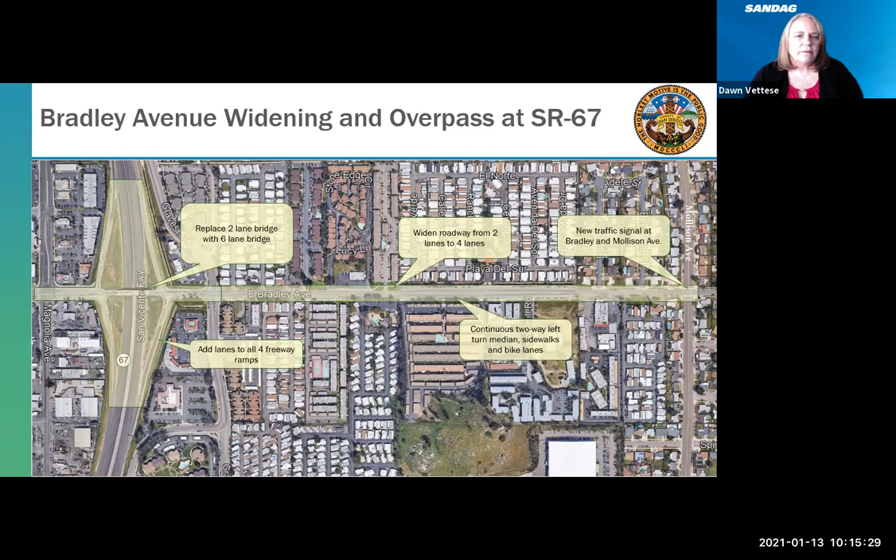That concludes my report, but we have Bill Morgan and Jim Bowles from the County of San Diego available to address any project-specific questions. I'll turn it back to you, Chair Kenny.

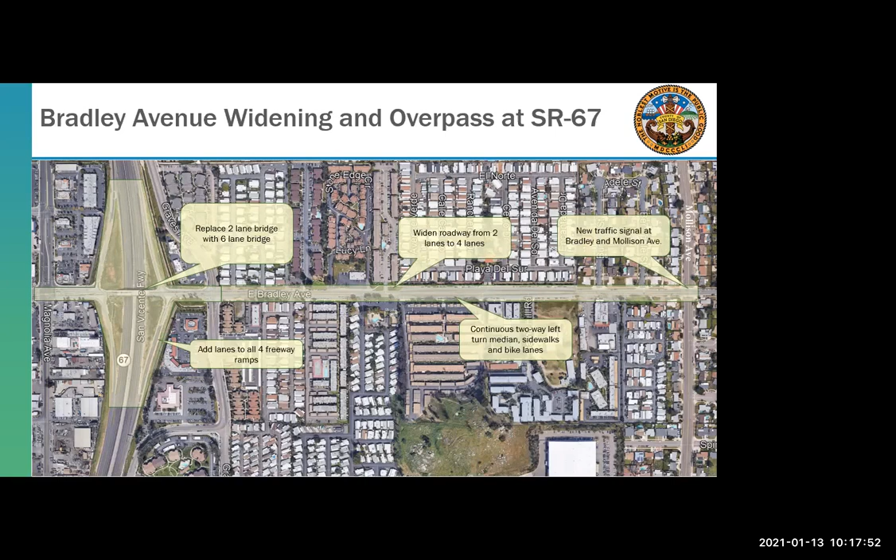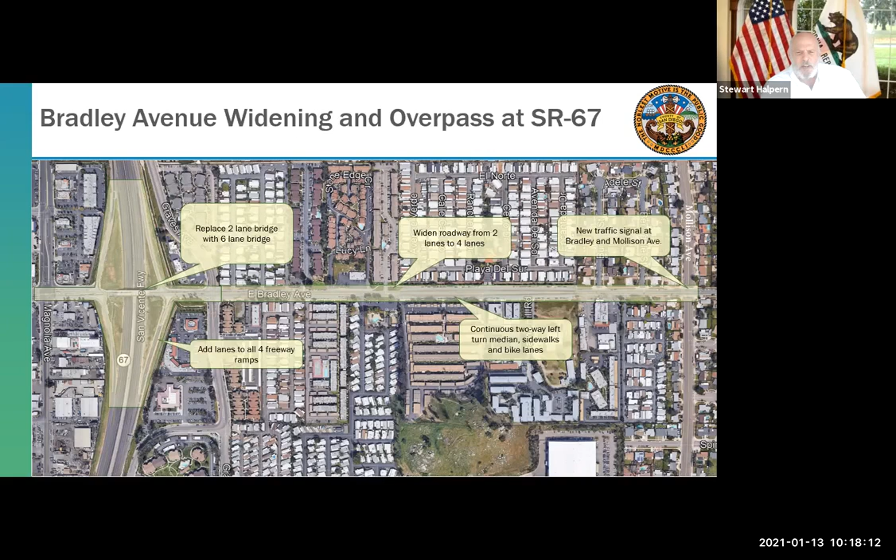Okay, thank you. Thanks, Bill. Stewart? Yeah, thanks, Tom. The question that comes to mind - I apologize, I know we've talked about this in the past, I just don't recall - this project takes, I think, about a third or so of the current availability under the commercial paper program. Dawn, or I don't know if Andre or Jose's on, refresh our memories as to how easy it would be to expand the commercial paper program.

My vague recollection from prior discussion of this is it's not so much a credit problem in terms of availability, but rather a board authorization thing, where the authorization just happened to be set at this level. Maybe walk us through, if there are additional desires to fund additional projects using commercial paper, how quickly we can respond to that.

Thank you, that's a great question. To refresh, I think what we reported back in November when we discussed the NCTD commercial paper - we do have a verbal that the credit from our CP provider could be quite easily expanded. The level is set at 100 million. Expansion of the commercial paper was also one of the options in our cash flow presentation. So we are looking to come back in the springtime to request expansion of the commercial paper program.

This particular draw on funds from the commercial paper program fits within the existing capacity and the balance outstanding. Since this is a rolling program, folks who have already accessed it are repaying principal as new draws are made. We've run that analysis and don't anticipate a problem with the draws and the draw schedules in the near term. The program actually needs to be renewed in the late fall regardless. We would seek board approval to expand the program, but since there are fees with the amount of credit that's extended, to be prudent, we would not necessarily exercise that immediately until it's needed.

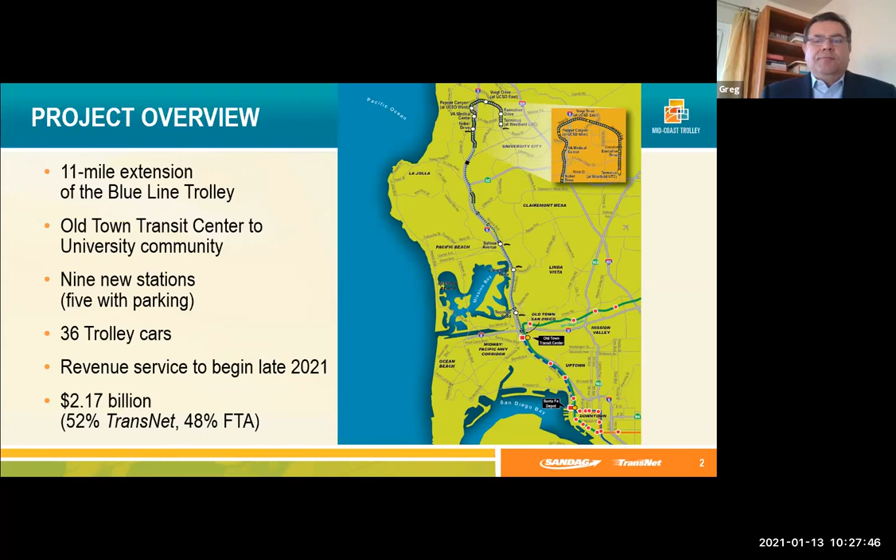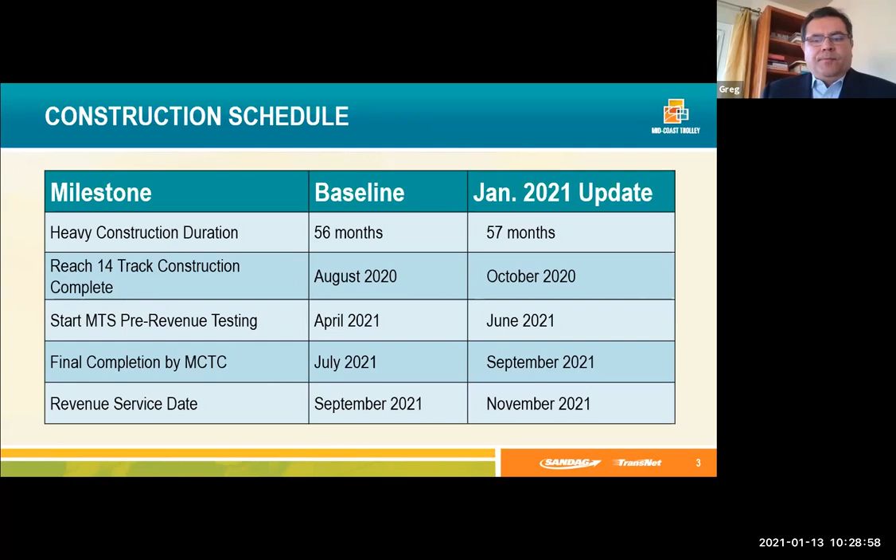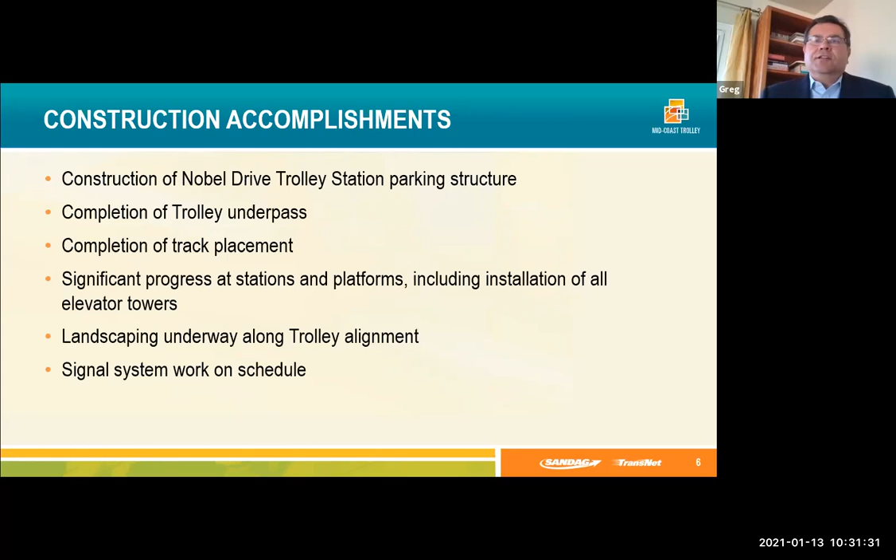The trolley underpass at La Jolla Colony Drive is now complete, and I'll be able to share a picture of that. Track placement is also completed. We're really focusing now on getting our stations up and running and ready so we can start testing necessary to move forward with running trains on the tracks, completing pre-revenue operations testing in time for opening revenue service this year. We've also started landscaping efforts along the corridor, and signal system work is on schedule.

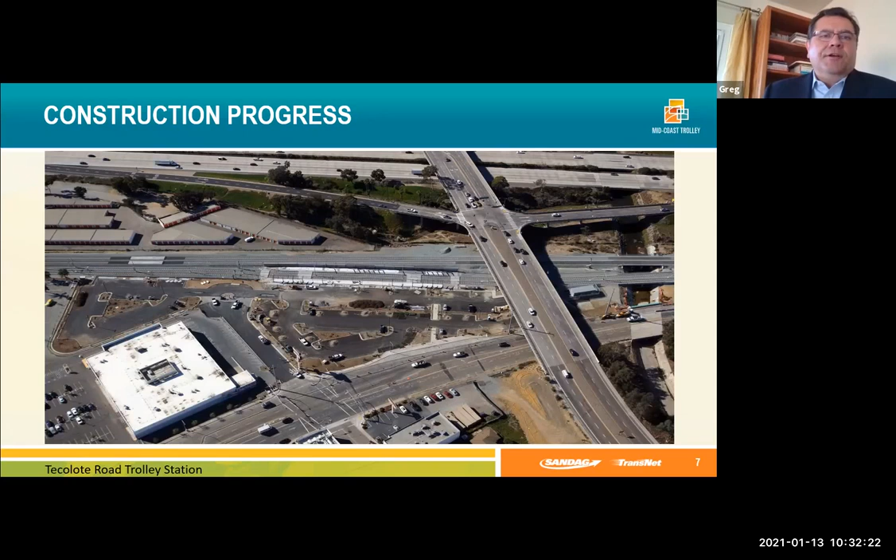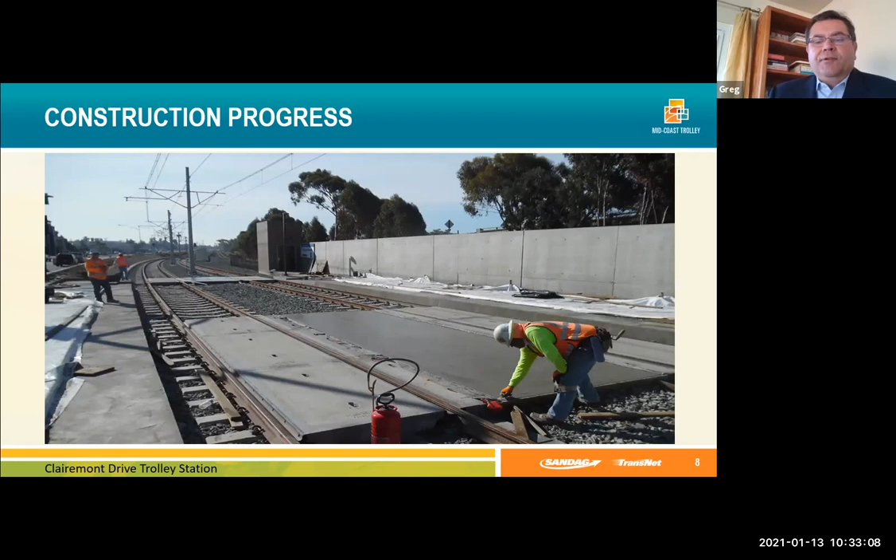We are working with private developers right across the Morena Boulevard to help us provide the 150 parking stalls that will be supporting our transit users. We're working closely with his transit-oriented development and seeing how that continues to move forward. As part of his development, we are also working in mobility hub features such as pick-up and drop-off areas, next bus signage, as well as trolley schedule information. So we'll continue to work with him as we complete that station.

At the Balboa station, it's our third at-grade station. You can start seeing the park and ride facilities start taking shape. We already have the access in place. One of the additional features that the Balboa station brings is that we do have actual bus bays for buses to come in and serve all the adjacent communities. We also have, just to the north over Balboa, a pedestrian crossing so that it can facilitate pedestrians coming from the north side of Balboa Avenue to the station itself. So those are some of the other key features we have going on there.

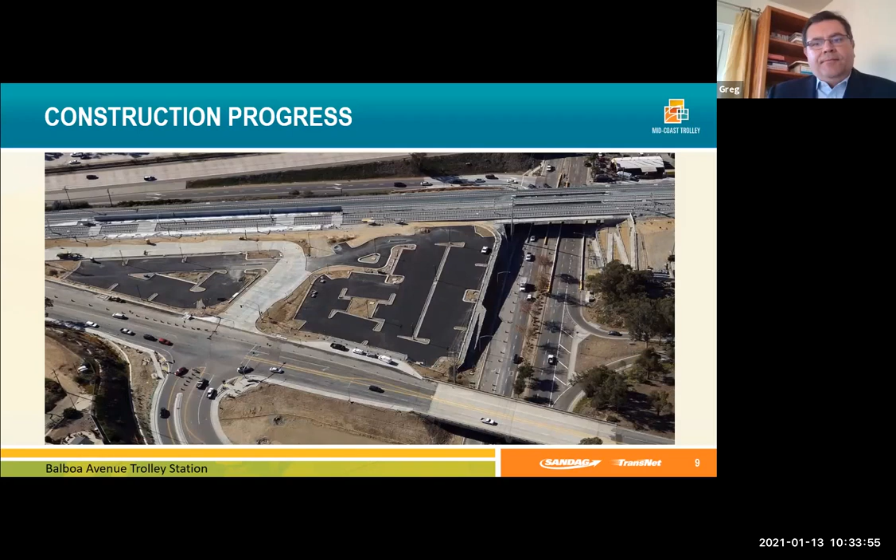Our flyover is basically where the light rail system, prior to this location here near the end of Santa Fe Street, is on the east side of the railroad corridor. This flyover structure allows us to move our light rail system to the west side of the corridor and allows the LOSSAN tracks to continue on in the eastbound direction. Then from this point on, we continue into the Interstate 5 corridor. The inset there kind of shows you a look of our light rail facilities. Just to the left, you'll see a nicely sculptured retaining wall that is there to support the Rose Creek bike path, which was constructed as part of the Midcoast project.

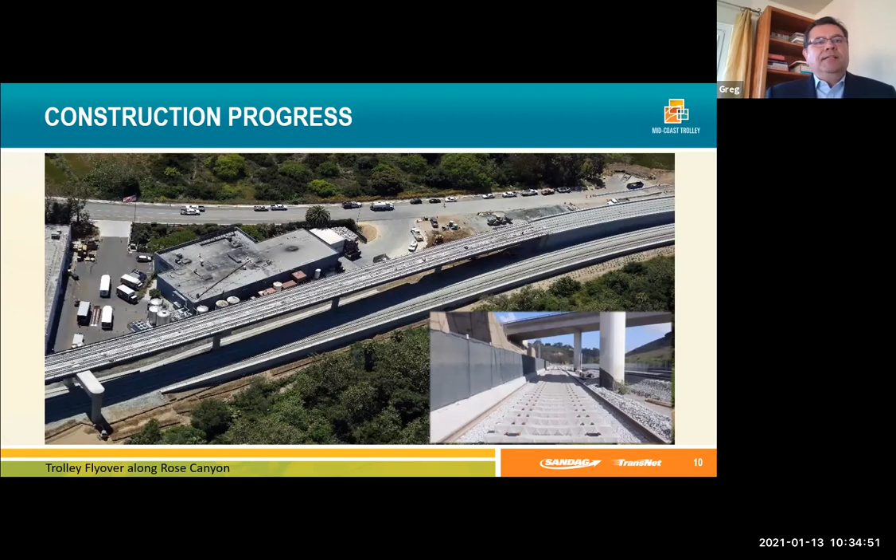Here's an aerial shot of our underpass at La Jolla Colony Drive. The project is completely grade separated, and we also have a traction power substation there to the left. We are working very closely with SDG&E to ensure that we have all the power necessary to start completing our testing and operations plan for the trolley system. So you'll be seeing that the traction power substation will be energized within the next few weeks, and we'll continue to move forward with other locations throughout the corridor.

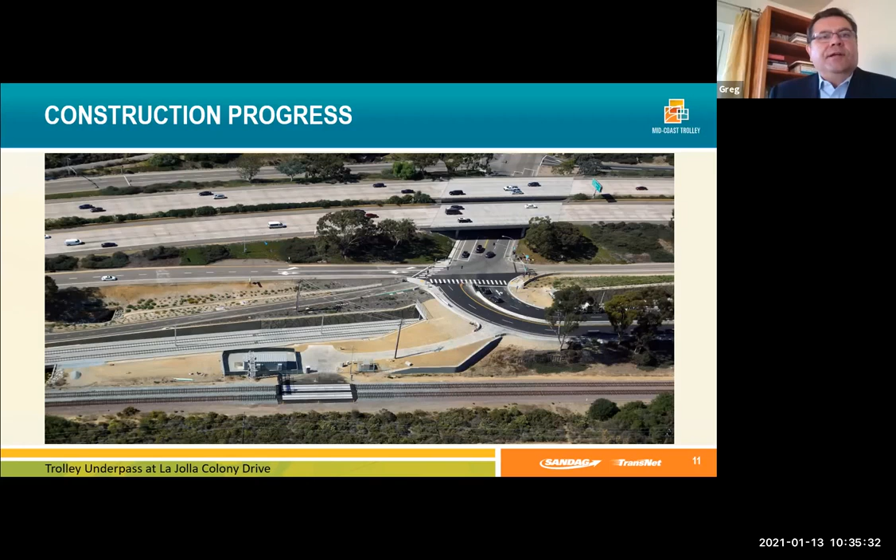Here's another shot within the undercrossing. It shows the center pier wall as well as the exterior walls and the track alignment. We also show some of the architectural features applied to the retaining wall system as you continue north of the structured area.

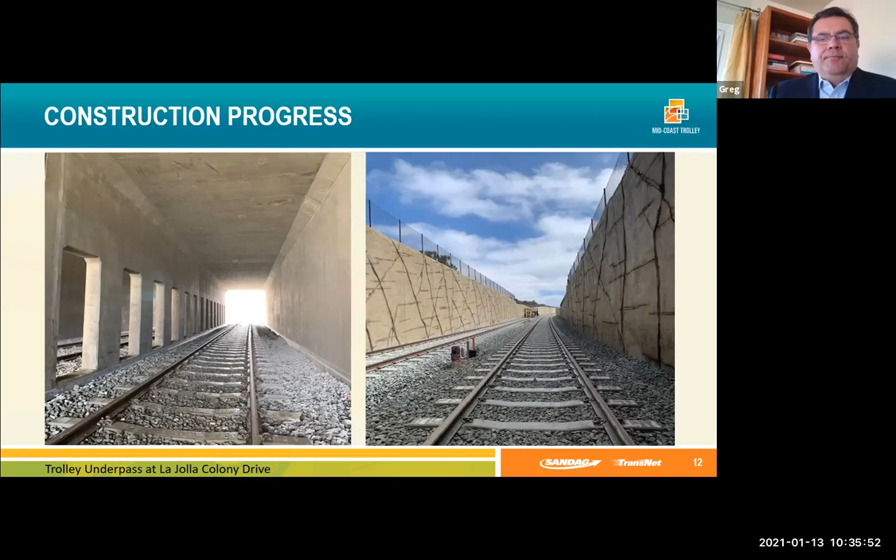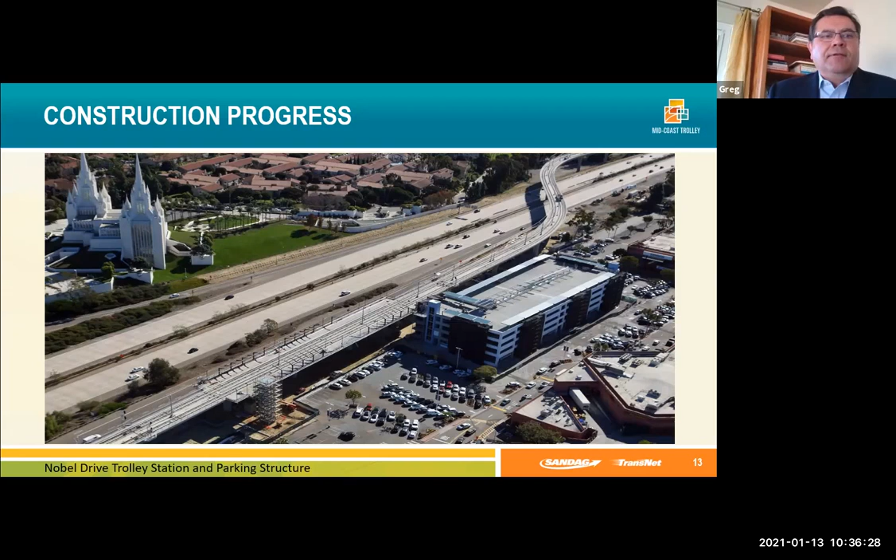This is a view of our Nobel light rail station. It also shows the parking facility that we have constructed to the right of the station, and we are continuing to progress with that. As I mentioned earlier, we're hoping to have that parking structure open for use. Once we have it open, we're going to be able to transition into surface lot improvements, as well as completing some of the plaza improvements that will support the light rail aerial structure and station.

Here's a view looking northbound onto the VA station. To the right is a retaining wall that you can see from the Interstate 5 corridor. You can see that we have already started some of the structural elements that will be supporting the canopies and the platform area work. Where that worker is standing, there's a white tarp over a glass seeded aggregate finish that has already been applied to the plaza area. In the center, we already have our overhead catenary system, wiring, and messenger wires in place at this location.

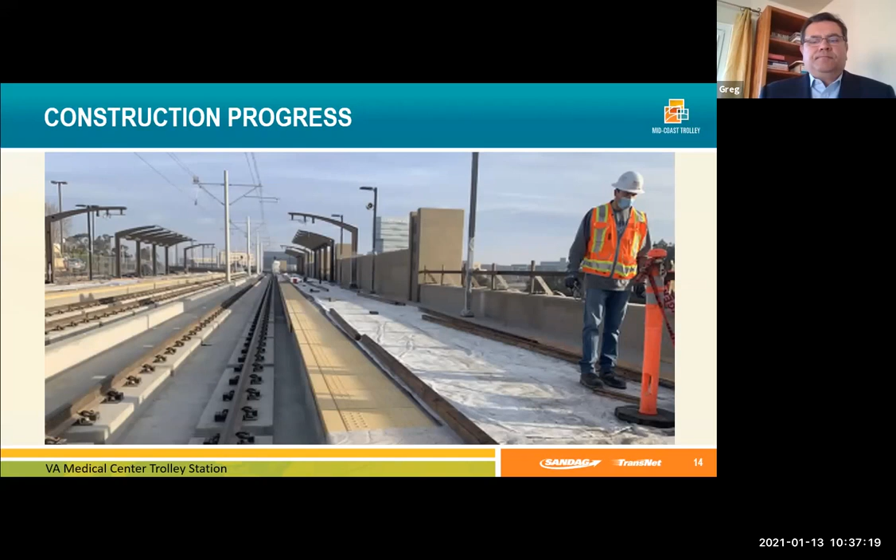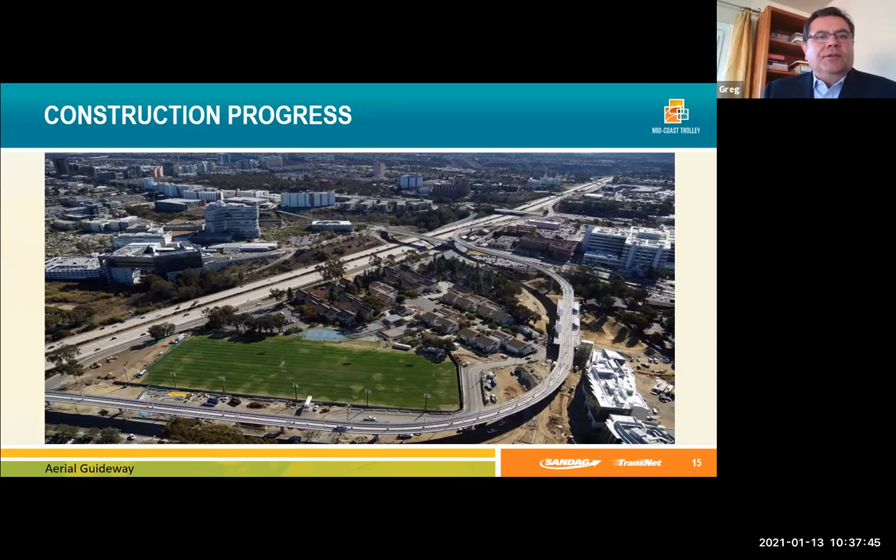This view is a southbound view overlooking the UC San Diego campus, showing the alignment coming from the VA. It has a bit of an S curve, coming into our next aerial station at Pepper Canyon. As you can see, there's a lot of construction going on there. The viaduct is completed, as well as all the track work, and we're just about there with our overhead catenary system.

The project will require a restoration of the field that you see there. We have a detour in place right now. One of the things that has been really great is support from UC San Diego.

We've worked very closely in the development of the landscaping in this area, and at the base of the plaza area for this Pepper Canyon station, we've incorporated a bus turnaround area to facilitate drop-offs, as well as other UC San Diego transit facilities. We'll also be incorporating a roundabout intersection leading into the station. A lot of these improvements are also funded by UC San Diego.

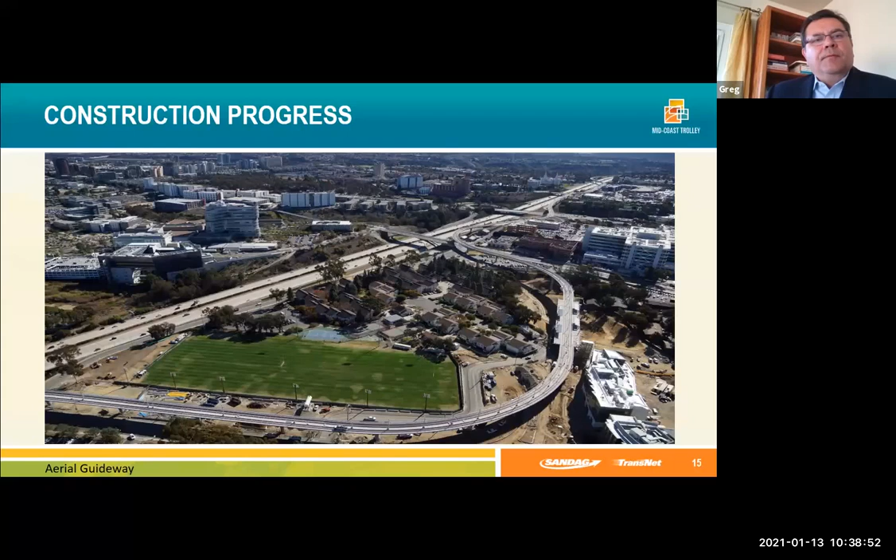So at the end of the day, we're really going to have a complete looking system that benefits bicyclists as well as pedestrians, and serves the trolley station. Our next slide will show another view of this location.

One of the things that, again, our contractor has done a really outstanding job on: you can see in the middle is the light rail station. To the left, you'll see our elevator towers. And then right to the left of that is a building that...

...UC San Diego is having in construction. That building is about 50 feet or so offset from our light rail viaduct system. The continued coordination there has been instrumental between all contractors involved to get this project working and completed, which should be within the next few months, keeping us on schedule.

To the right, all that area underneath the elevated or aerial station will be landscaped as part of the Mid-Coast project.

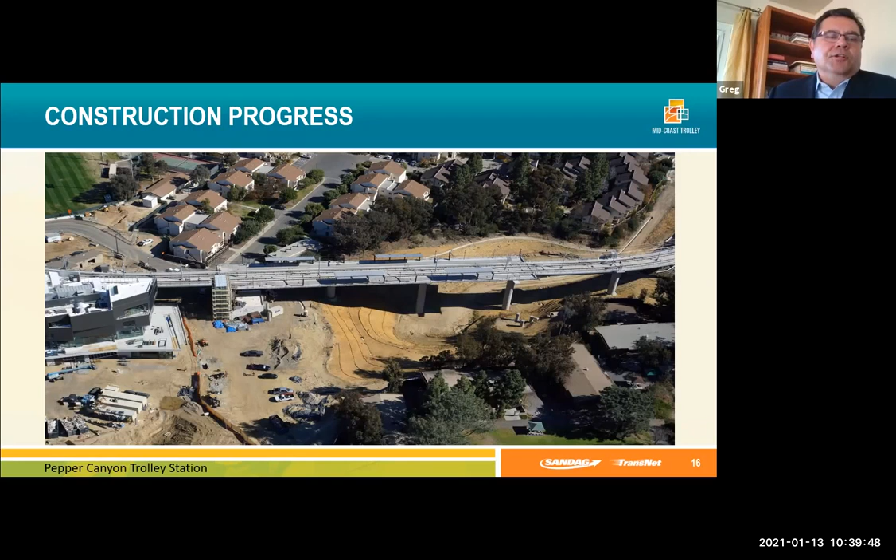This next slide shows some flat work and stairwell improvements being constructed at our Voigt station. In the background, you can see the Zymed building, and behind that is the Scripps Memorial Hospital facility. This station will service all the research centers at the UC San Diego campus, as well as those adjacent medical facilities, and Preuss School, which is just across the way.

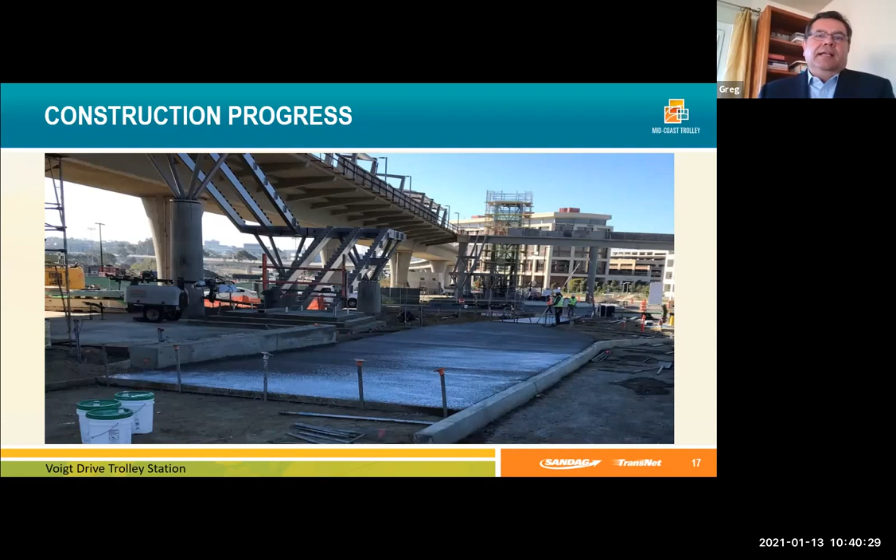In the background there, you can see a pedestrian bridge that will also be constructed to provide direct access to the Preuss School and adjacent properties to the north of Voigt Drive.

Here are some more plaza improvements being constructed at our Executive Drive trolley station. You can see the stairwells that we'll be providing there, and in the background is the elevator towers.

Again, we're working directly with the developer at this site, and once we complete some of the basic site improvements and pavers and whatnot, they're going to come in and do the landscaping. We entered into an agreement during our right-of-way negotiations, as that was something the property owner really wanted to do, to ensure that everything married well and met the project's needs as well. So another good example of the collaboration on this project.

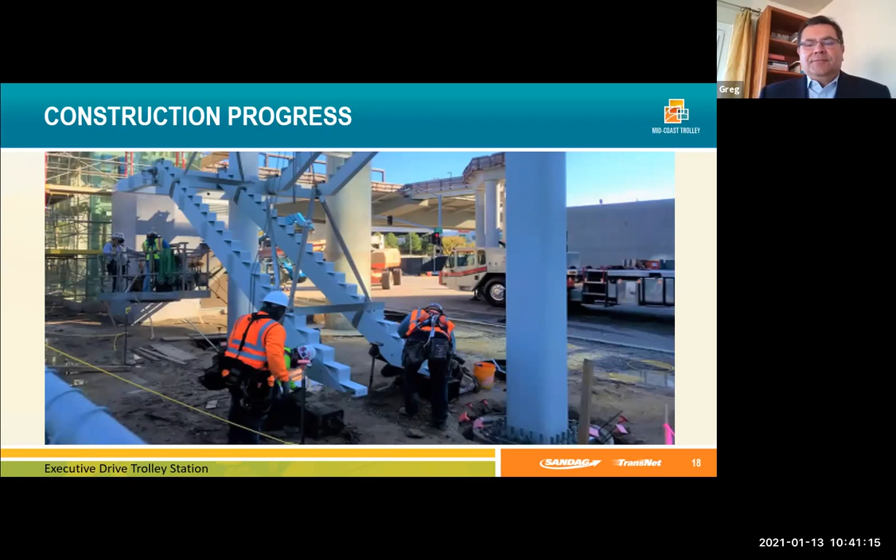And then this is our last station, the UTC Transit Center station. You can see the Transit Center directly in the center of this photo. To the left, you'll see some elevator systems and pedestrian walkways that lead to the aerial station down the middle of Genesee Avenue.

We've worked with both developers to locate these pedestrian access points and integrate it with their existing development, and we continue to do that with Westfield folks to the east of this corridor. We are now in the process of completing a design of a parking facility that will accommodate at least 260 spaces for parking to support transit users in that area.

We're anticipating construction will start within the next few months and hopefully be completed in line with the opening and revenue service start date later this year.

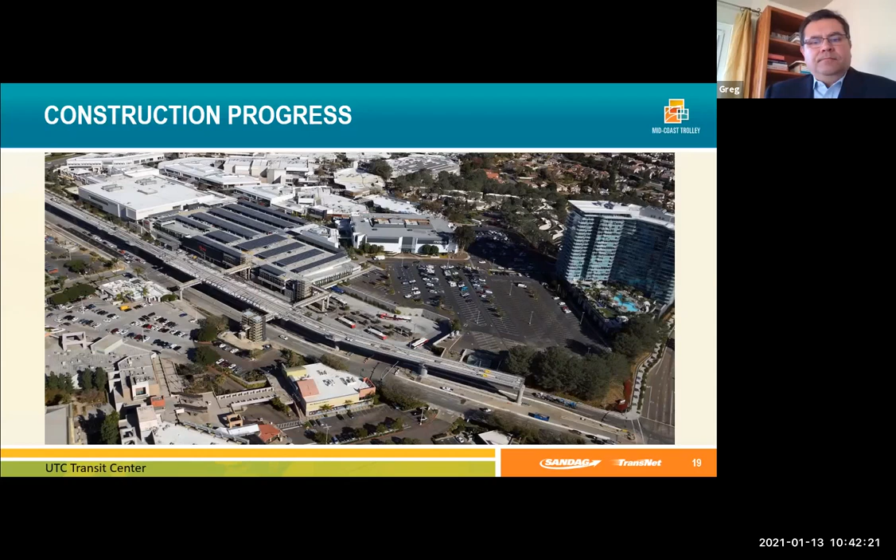On project risk, as we move forward to complete construction, we will continue to maintain the project risk and contingency management plan for the Mid-Coast project. We do project risk register updates bi-monthly to track, monitor, and identify any new risks that we may be facing as we continue to move forward in other areas of construction.

This table here shows some of our top risks that we have identified and will continue to monitor. One of the big ones is the right-of-way cost. A lot of our right-of-way has certainly been acquired to support construction, but we may not have completed settlement on all of those. And as we continue to move forward trying to reach agreements, some properties may end up going to trial.

And so again, we continue to monitor costs, but at this point, we have identified what we think the actual estimated cost at completion will be, and incorporating the budget, we're still looking healthy on that front.

Again, there are a couple other areas where we have right of way issues, where potential goodwill claims could come at the completion of the project. That is where we don't have any federal participation supporting that effort. We do have a budget associated with that and we'll continue to watch, but we've been very proactive in entertaining some tenants of these properties and have already come to an agreement and reached some settlements, so hopefully there will be no further potential for goodwill claims. We're trying to be proactive, but there is always that potential risk there.

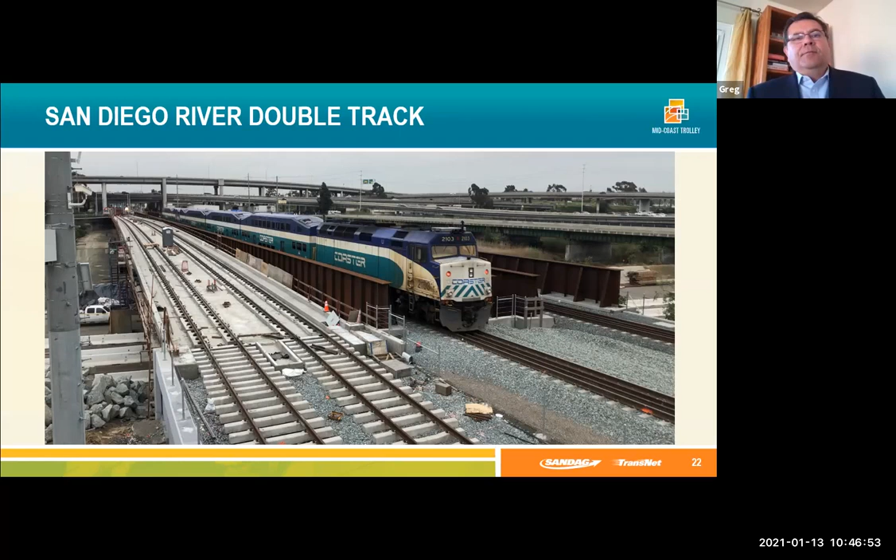This shows the double track efforts done at the San Diego River Double Track project. To the left are the light rail bridge facilities, and to the right you can see the COASTER already operating on the replaced bridge, and just to the west of that was a brand new bridge constructed to complete that section of double tracking on our LOSSAN system.

Next slide. This shows some of the track work constructed as part of the Elvira project. The Elvira project provided a double track system just a little bit south of Balboa Avenue and extended pretty much along to the flyover we saw earlier. It included bridge structures at Balboa Avenue and three crossings of Rose Creek, and that is now open for operation.

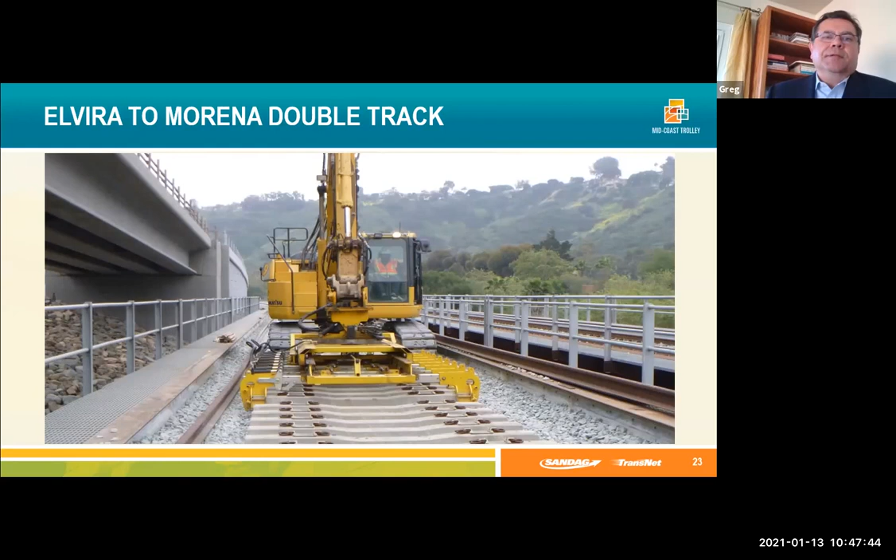Again, this along with the San Diego River Bridge, we do have some plant establishment and revegetation efforts within the creek area and the river area that we're continuing to maintain, ensuring everything comes to our expectations as far as the establishment of landscaping in those areas.

The I-5 Genesee Avenue Auxiliary Lane was recently opened late last year. That provides an additional lane to enhance operations of that section of Interstate 5 southbound traffic lanes, picking up from the Genesee on-ramp going southbound and terminating and dropping off at the La Jolla Village Drive off-ramp. That is now under operation, closely coordinated with a lot of the improvements you can see here on the project.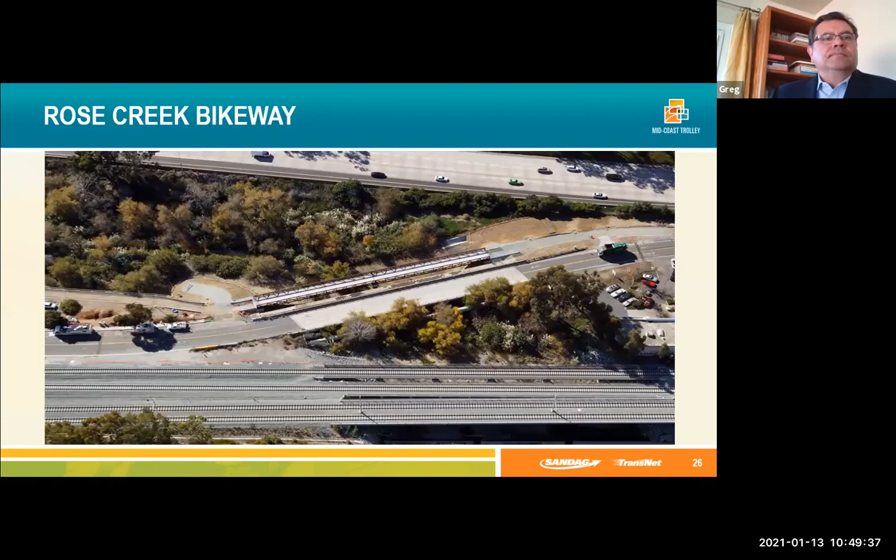The Voigt Drive Improvement Project will realign Campus Point and provide better access to the Voigt LRT station. It will also provide parking lot improvements that allow access from both the east and west side of Campus Point, the new Campus Point you see there in operation. We've also provided improvements to the Preuss School parking lot to better facilitate pedestrian circulation and access from our landings on the north side of Voigt to get to the bridge and to our trolley station.

This project is still under construction, and we're working very closely with the Midcoast project. Next elements of work scheduled would be the parking lot construction, completion of the roadway improvements, and then advancing to final landscaping of the corridor in that area for both the Midcoast and the Voigt project.

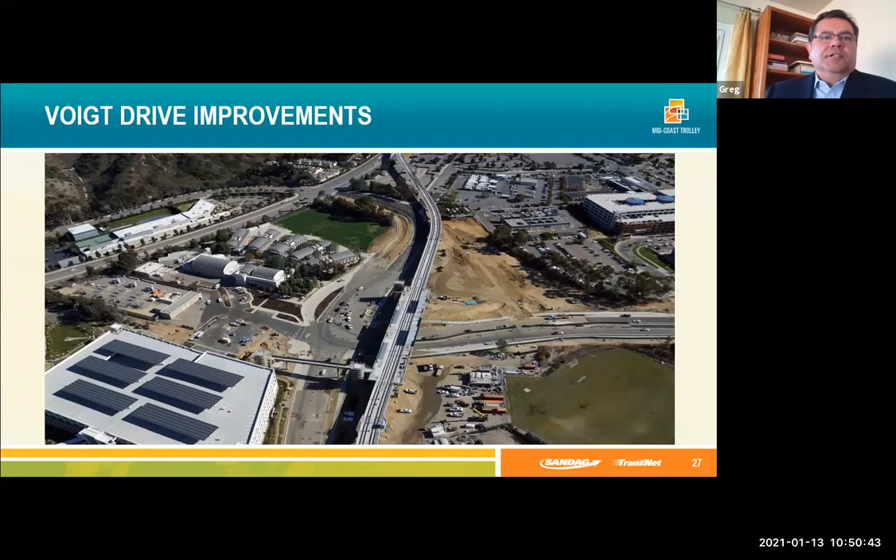Due to COVID, our public outreach activities have been modified in accordance with government policies. We are providing project updates through electronic media. As today, we are attending virtual community planning group meetings, and we're having ongoing bi-monthly virtual briefings with city council staff. Some significant construction events are covered on multiple news outlets, and we've started opening day planning for the Midcoast project—exciting news. We're going to be collaborating with a lot of our stakeholders and starting to see how we can put something together at the end of this year.

All right, well, thank you very much, Greg. An excellent presentation, an exciting project.

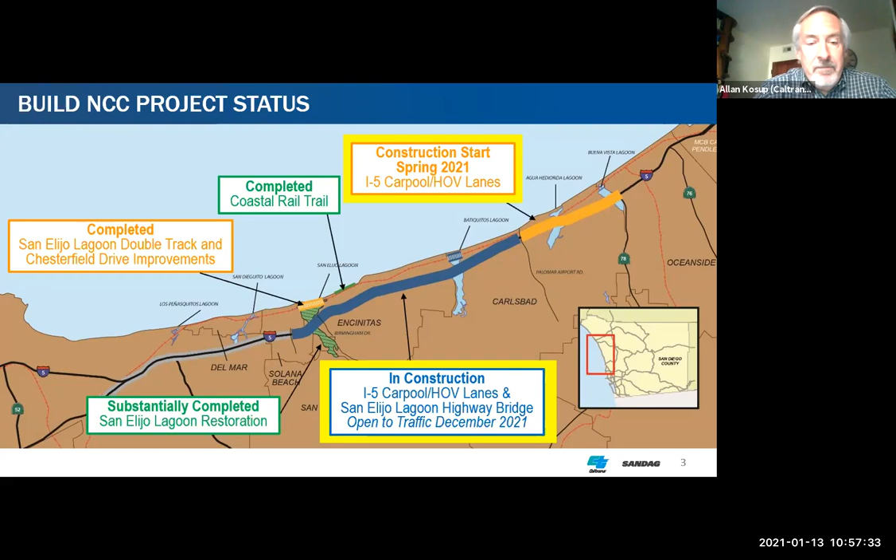The good news with this approach is you get the efficiencies and the innovation of building all these projects together. But the idea is as pieces are available, you can start on those pieces and open them to the public sooner. So it's not like we have to wait for it all to be done for the public to start seeing value.

So far, 3 of the major features are complete and open to the public. The double track was completed in 2019, the Coastal Rail Trail, and then in 2020 the lagoon restoration was completed. We're in plant establishment now, and really the remaining elements are the carpool lane extensions up to 78. This slide shows the quick status of those, and we'll get into a little more detail.

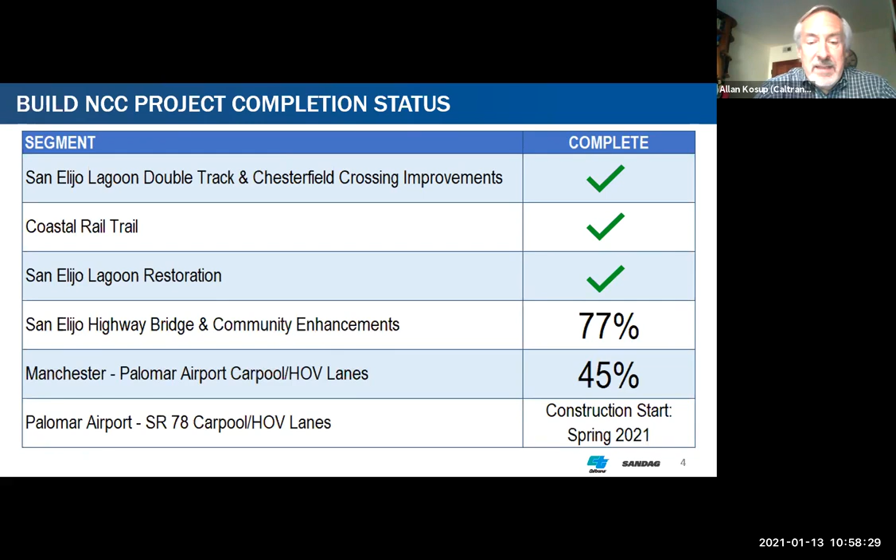Before we do, how can we have any conversation these days without talking about COVID and the impacts of COVID? I like to share this slide, thinking about COVID in at least 2 different ways. One is just the impact to the economy and the traveling public. This slide shows the reduction in traffic volumes over the last 12 months relative to the pre-COVID year. With summer and fall, we were hovering around minus 15%, probably representing a lot of tourism and just people telecommuting.

Since the lockdown in December, that's increased even further, and we're probably in the minus 20 to minus 25% traffic volume range. So as a reference indicator of economic health and mobility, I think this slide does well. The other thing is just the health of the project team and how that impacts construction.

It is a big team. On any given day, it's a 13-mile long project, and we can probably have upwards of 300 people on site, and they're not always the same people. Some days we have iron workers, some days drillers, framers, carpenters, engineers. So the sphere of influence is probably much bigger than 300. Kudos to the team, the contractor, his employees.

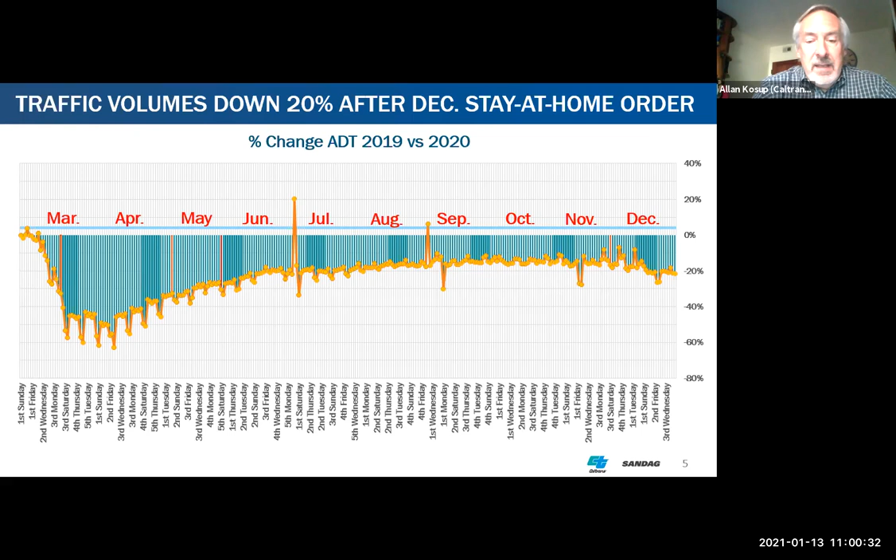Today we'll highlight some of the successes over the last 6 months - completion of the lagoon, the active transportation elements completed in Encinitas, and where we are on the highway construction. We'll also talk about the outstanding risks that are still there - the foundations, I think we're at the end of that item - and then where we are in funding the last project. Next slide.

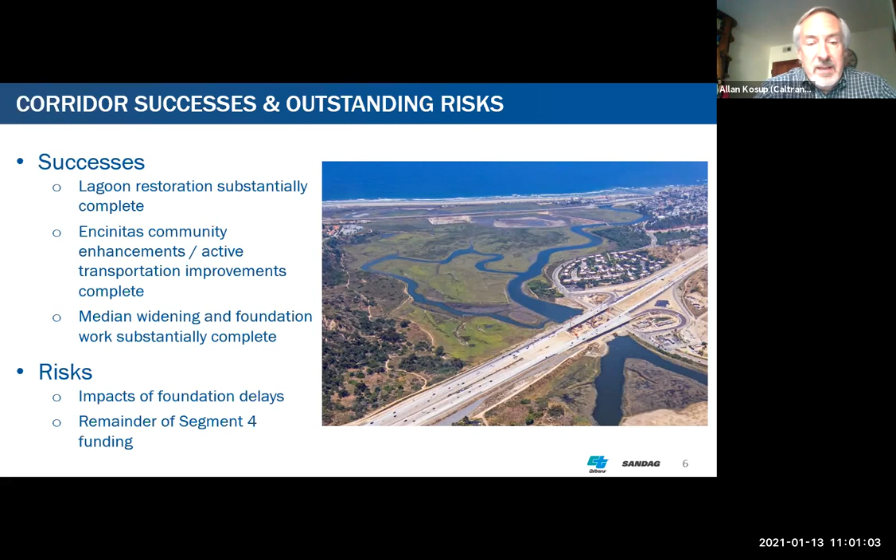Before we get into some of the details, I wanted to run through some construction slides. Unfortunately we didn't have an opportunity to do a typical ribbon cutting because of COVID, but we've had a soft opening on the San Elijo Lagoon restoration. This was some new trails and bridges built as part of that restoration. I'd encourage you, if you have a chance, to go out and walk it - it really is a great facility. Next slide.

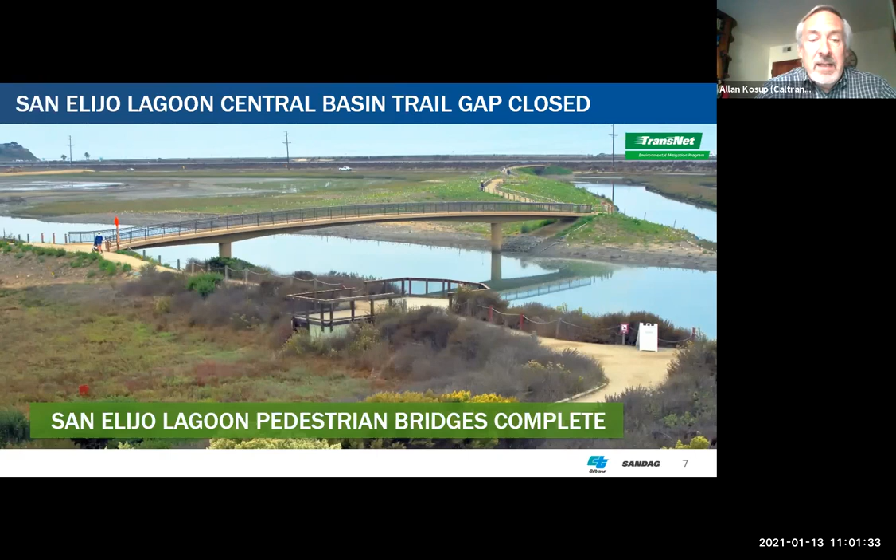So the construction is complete, the replaced planting is complete. As indicated by the flags, those are all plants - you're seeing it's greening up nicely. Because the lagoon restoration is a very dynamic, living thing, it's got a long-term plant establishment and monitoring to make sure we're really effective in creating the right environment and habitats we were planning, and potentially tweaking things if needed. But so far, so good. Many species are already coming back, and the Nature Collective, who manages the lagoon, have been very happy with how fast species are returning. So that's a good news story. Next slide.

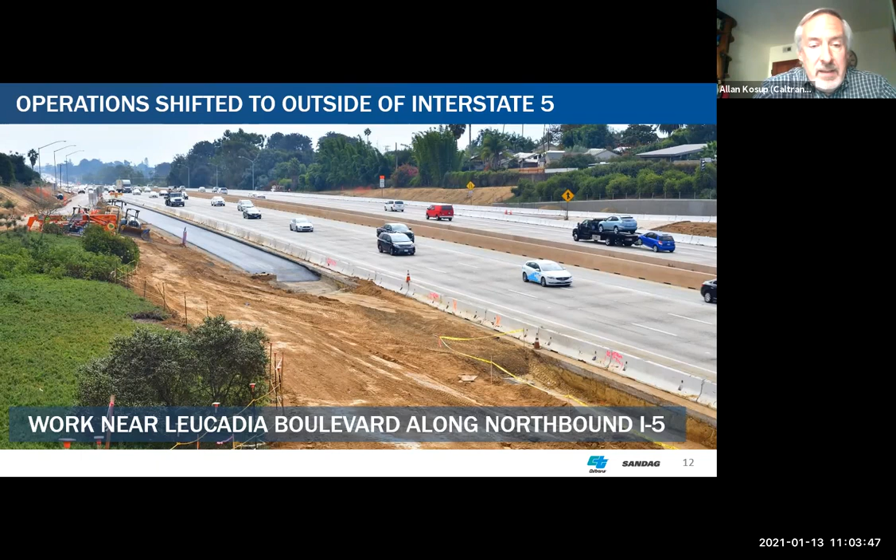As part of that, we're having to close some ramps and interchanges on weekends for what we call super closures - basically 56-hour closures, starting Friday night and finishing Sunday night. The lower traffic volumes have been helpful, allowing us to get out there, get in and get out a little bit quicker. That's working well, and it's been a good partnership with all the coastal cities - thanks to Encinitas, Carlsbad, Solana Beach - that we've been able to plan and work the detours, and it's going very well. Next slide.

If you've been here for all of my last 4 years of trials and tribulations of building this project, the drilling and foundation work in the lagoon at Manchester has been the most difficult aspect of the project. That's because these columns are over 250 feet deep, 10-foot diameter, and we're basically drilling in muck. It really is at the tip of technology in terms of building these columns, and they have been a little difficult.

What happens when you're down that deep is the walls tend to cave in, and it's hard to get a real solid foundation. A couple times we've had to do them multiple times to get them right, and not something we want to take lightly. So these foundations have been difficult. The good news is we poured our last one in December. There were 17 of them, so that risk is behind us. What that means is we're essentially out of the ground. On these major construction projects, geotech, utilities, foundations really are the highest risk, and that's behind us.

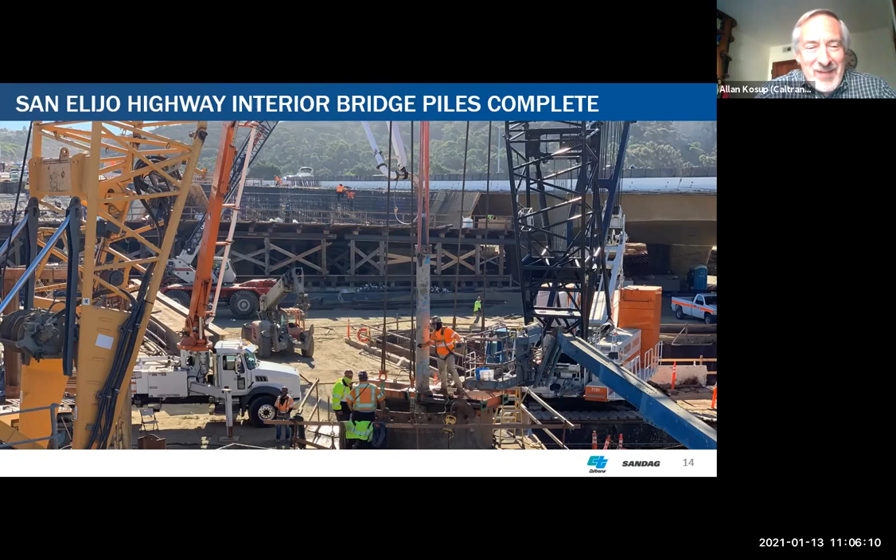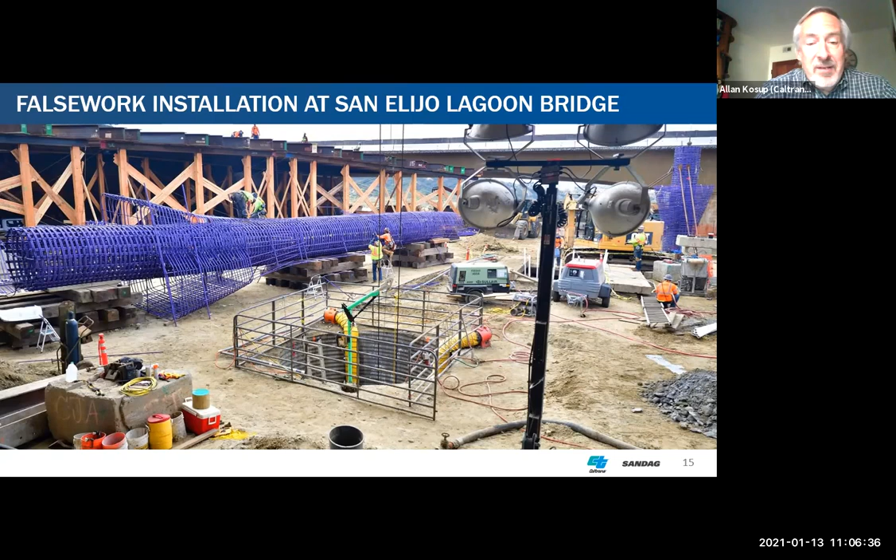This is just an example. This is the hole that was drilled, and then the purple cage gets dropped into the hole and then pumped 250 feet, 10-foot diameter, so it's basically a 17-hour pour of concrete into the hole. It's a lot of concrete.

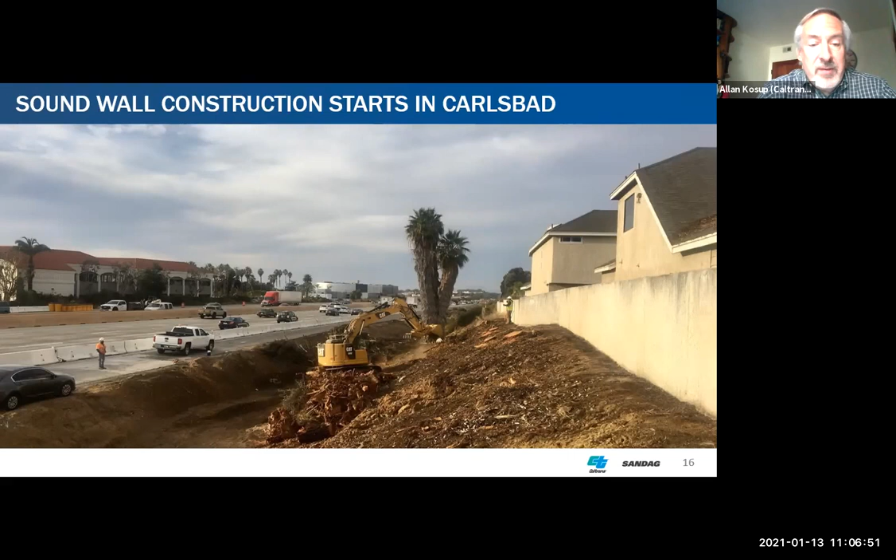Last construction photo I wanted to share was just sound walls. Sound walls now are beginning to get constructed in Carlsbad, so you see that work going on out there as you drive through.

So what does it mean from sort of cost and schedule? From a cost perspective, the foundations took us about another 10 months to get done than we originally anticipated. Because of the extra time, they are a little bit more costly than we anticipated. The good news is that we have the contingency, it's within our contingency where we're planning for that risk. So we're still confident we can deliver the project within budget.

When you look at the schedule, the important thing from the carpool lanes is getting them open to at least into Carlsbad, so there was a little bit of float. The bridge work at Manchester, even though it took us a little longer, is not delaying the opening of the carpool lanes to Palomar. By the end of this year, we anticipate having those lanes open to traffic. So we think that's a good news story. We're sort of neck and neck with the trolley line, so winter of this year will be a great story for San Diego. Two major construction projects we've been working on for years will be open to the public.

The last project we want to touch on is Palomar Airport to 78. It extends those carpool lanes another 4 miles from Palomar to 78. This was the project where we've had a bit of a disconnect between when the job was delivered by the engineers and when the money would be available from the state of California. Going back a couple years ago, when this project was programmed by the California Transportation Commission, based on their cash flow, they weren't able to get us the money until basically July of 22. We were ready in July of 20. So we've been working with them to try to advance that money and get under construction ASAP.

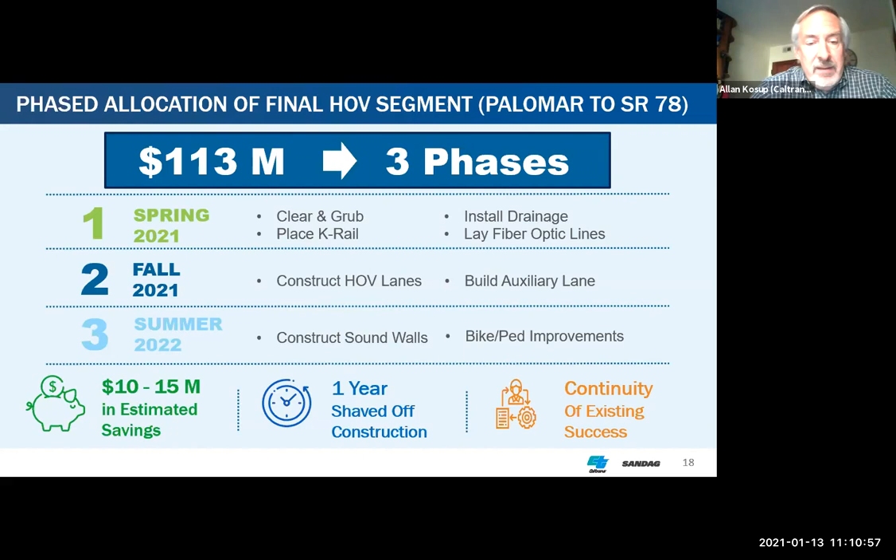Let me unmute. Mr. Kosup, thank you very much. Before we take it back to committee, do we have any members of the general public who'd like to speak on this issue?

No, Chair, I don't see any hands raised. All right, well, do we have any committee members who would like to ask Mr. Kosup some questions? Let me scroll.

Well, I have one. So, Allan, isn't there a little bit of a risk doing a third of a project with a third of the funding available, and then having a second third of a project done with another round of funding? What precautions are in place to make sure we can get all of the funding on the schedule they've planned? Yeah, it's a great question.

One of our strategies at San Diego has always been to get projects ready to go, because generally in the rest of the state there's always some flexibility in other people's schedules. So if anyone ever slips in a different county, we're the ones that are there to say, okay, we're ready, please advance our money. We've had a very good track record of that.